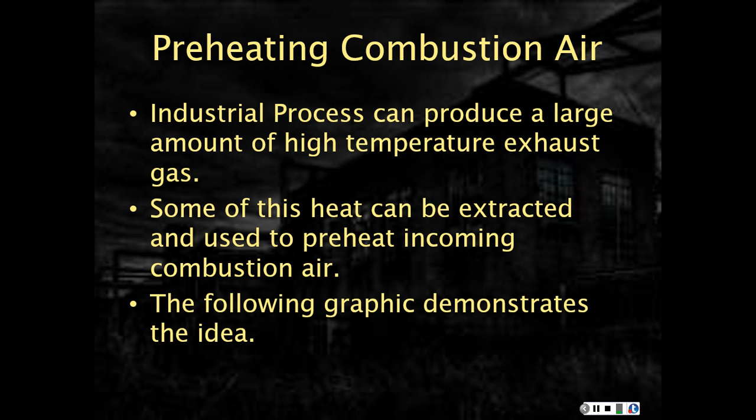The following graphic demonstrates the idea. Here's the situation that we have initially. We have some sort of industrial boiler and/or process. It's bringing in combustion air. Now, depending on where it's taking it from, it may be taking it from the surrounding area, or it may be ducted in from the outside. Either way, we have a temperature of supply air for the combustion air gas. This is being heated up in here to do whatever process we're doing, and then we're exhausting very high temperature gas. In this case, we're exhausting gas at 2,600 degrees Fahrenheit.

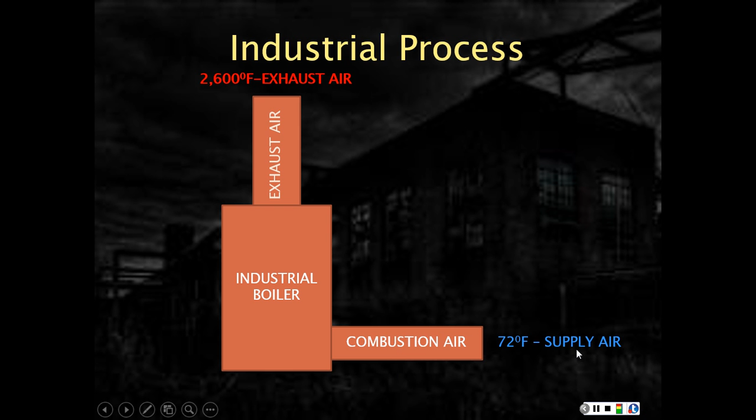What we'd like to do is extract some of this heat from here and preheat the supply air here, as noted on this slide. So we have a heat exchanger in the combustion air, we have a heat exchanger down in the supply air, and then we have some sort of fluid, oil, something that's tolerant of real high heat, that has an ultra high boiling point, that we can circulate down and through the heat exchanger to transfer some of that heat.

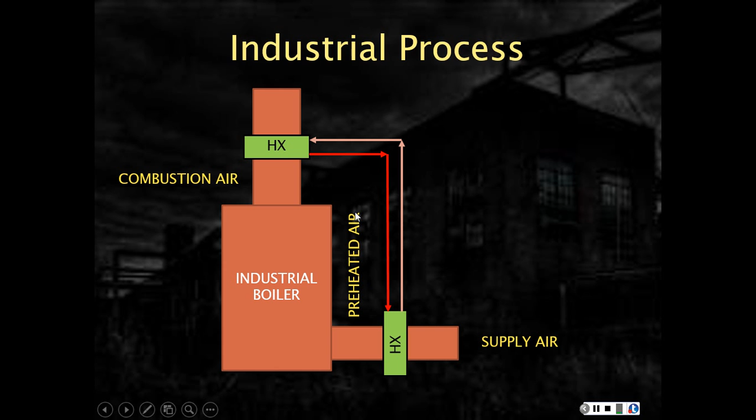Now the equation for savings. It's basically a 3-step process. Step 1 is we need to calculate the preheated supply air temp. So if we go back to the previous slide, you'll notice that this is our supply of combustion air initially coming in. It's run through this heat exchanger. Now it's actually been preheated. So we actually have a preheated supply air going into the industrial boiler. We need to determine this value first. So that's step 1.

Step 2, we need to get the fuel saved from a proper table. Now I've included those tables in your notes, so you have the proper tables at the end of your notes. Then we take that and we calculate savings. So again, 3-step process. Now there's 2 sets of formulas. The first formula is to calculate the preheated supply air temp. What we're going to need there is the exhaust air temperature coming off the boiler initially, and we're going to need to know the initial supply air temp, which is whatever the temperature of that combustion air where it's pulling it from.

This is multiplied by an effectiveness number. Now, high temperature heat exchanger manufacturers are the ones that produce the effectiveness number, which is really the efficiency of the heat exchanger. The typical number used is about 55. So that's what we're going to be using in our example. But you can go to the heat exchanger manufacturer for these high temperature heat exchangers and get a precise number depending on your application.

Now, once we get this preheated supply air, we take that along with the exhaust air temperature and go to a table, which we're going to look at in a minute. We bring that back after we calculate from the table a percent fuel saved, and then we can plug it into this bottom formula and get how much money we're going to save per year.

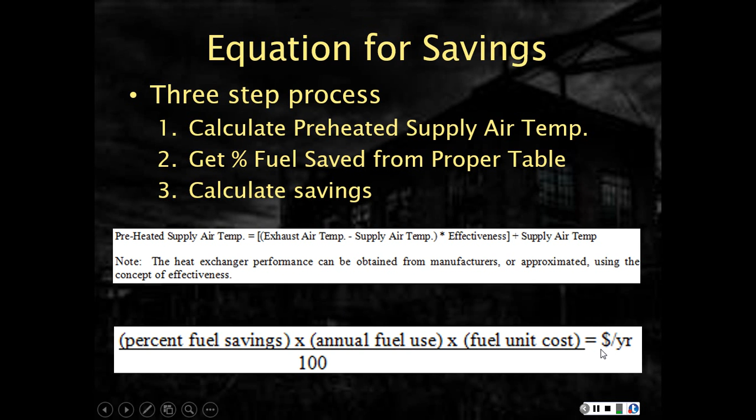So, step 1, calculate preheat. Again, effectiveness, this is the efficiency of that high temperature heat exchanger. On this application, we're going to assume 55%. Again, you can go to the heat exchanger manufacturer and get precise numbers. It just happens that most of them are about 55% effective or efficient. What you need is the original supply air temp, in other words, the temperature of the air where I'm pulling my initial supply air for combustion. I need the exhaust gas temperature and the effectiveness. And again, we're going to use 55.

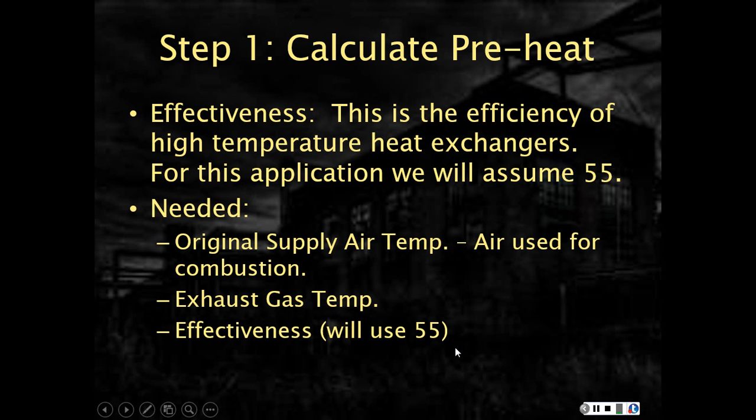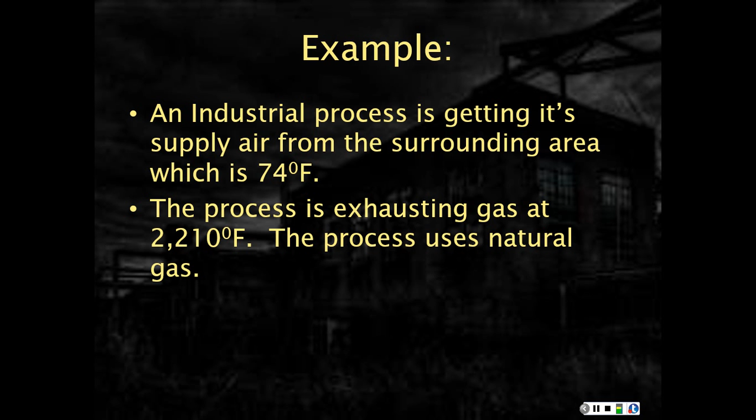So here's our overall example. I have an industrial process. It's getting supply air from the surrounding area, which is typically around 74 degrees. The process is exhausting gas at 2,210 degrees, and the process is currently using natural gas. So that's important when we take it to the proper table. So given supply air temp 74, exhaust air temp 2210, process annual fuel use about 12,456 ccf. The fuel content per 100 cubic feet is 100,000 BTUs, and they're paying about 49 cents per ccf.

So step one would be to calculate the preheat of the supply air temp. So we take the exhaust air minus the supply air, then multiply by the effectiveness, and then we add the supply air temp. So when we run through that equation, we get a preheated supply air temp of 1248.8. So you can say 1249.

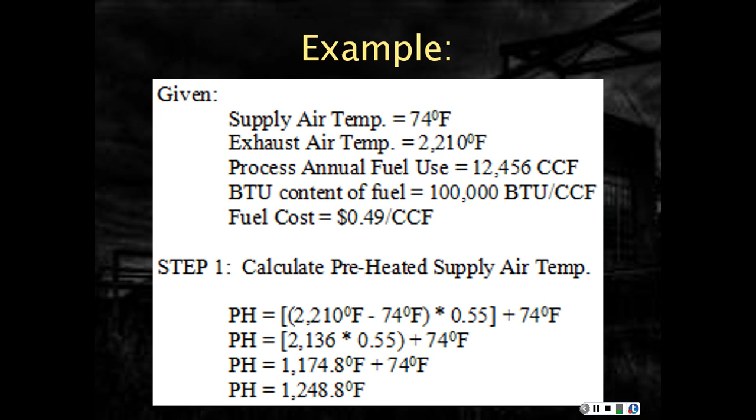Step two, we need to get the fuel saved from the proper table. Use the proper fuel saved table, in other words, for whatever you're using, whether it's number 2 fuel oil, natural gas, whatever. You need the exhaust air temperature and you need that preheated supply air temperature that you just calculated.

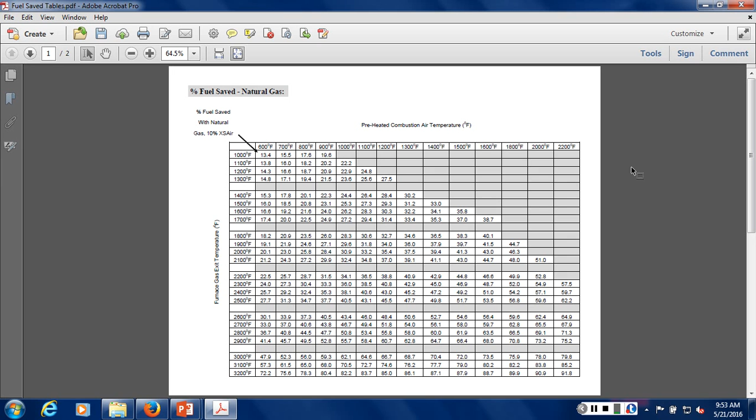And all these numbers within the table, those are a percent of the fuel saved by preheating that combustion air. And you can see it can be fairly significant. Now let's go back to our example. We calculated our preheated supply air temp at 1249. Our furnace gas exhaust temperature was 2210. You'll notice that from that natural gas table, both these numbers fall between actual values.

So this is my little interpolation table. What I do is I put the value of percent fuel saved for the 2200 exhaust gas temp at a 1200 preheat temp. I would save 38.8% of my fuel. Then I put in the high end. So in other words, I'm putting in the numbers that bridge both the preheat air and the exhaust air. So I put those four values in. Now what I'm shooting for is a value that's going to occupy this center square. So the bad part is that I'm going to have to do a double interpolation on it. So you do one direction first, then the final direction.

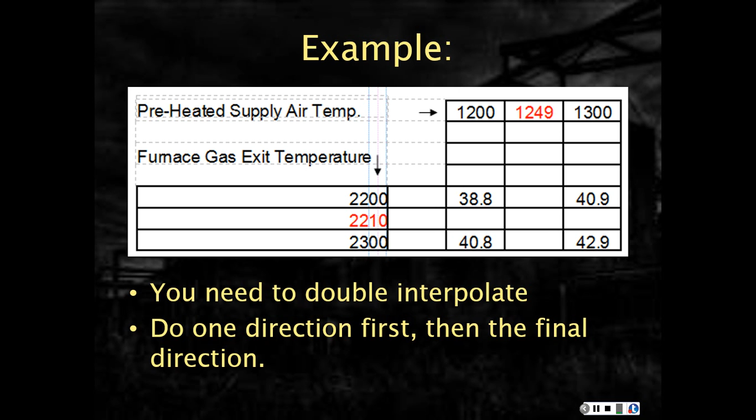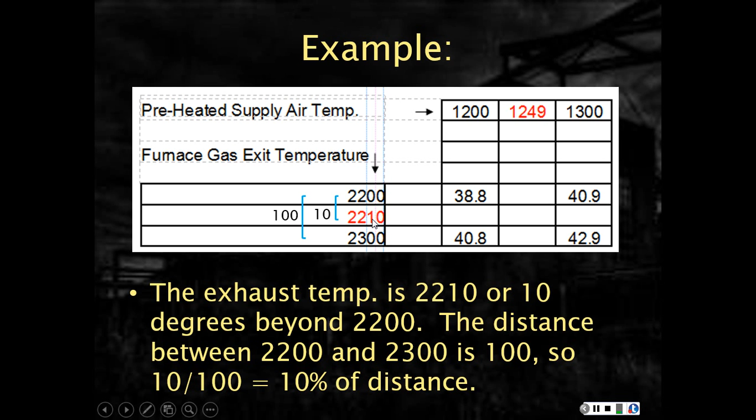So step one, if I look at the distance my exhaust temperature is, the total difference between things on the chart is exactly 100. And in my case, I'm at 2210 from the 2200. So in other words, I've moved 10 increments over an overall distance of 100 increments. So that distance over the total distance that I could travel, I simply set up a ratio, 10 over 100, which really makes it easy. So I'm 10% of the distance along this table. I can apply that same situation to this.

So in this case, my total distance of fuel saved is 38.8 to 40.8. So that total distance is a distance of 2. I know I went 10% the distance here, so that means I went 10% this distance. So 10% of a total distance of 2 is 0.2. So I have to take that 0.2, add it on to my starting point. That means at 2210, my fuel saved is 39. Now that's at a preheat supply temp of only 1200.

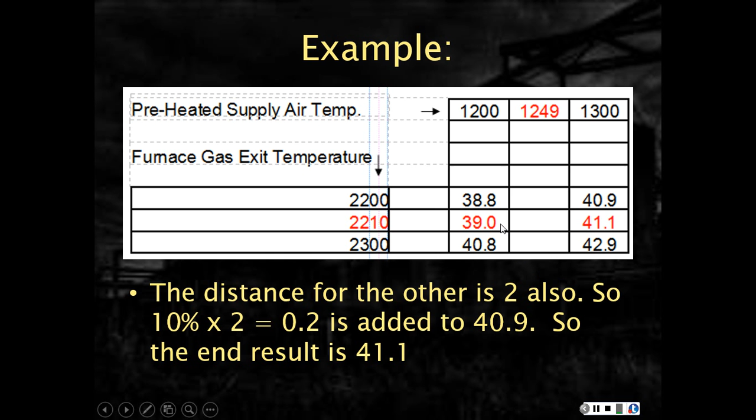What I have to do now is move over to this category and do the same exact thing. Again, my distance from 40.9 to 42.9 is also 2. I've gone 10% from here. So again, 10% of 2 is 0.2. I add that on to the 40.9, so I get 41.1. So now I have the percent fuel saved at a specific exhaust gas temp. Now I have to figure out what distance I've gone in this direction. So I have to interpolate between the 39 and the 41.1.

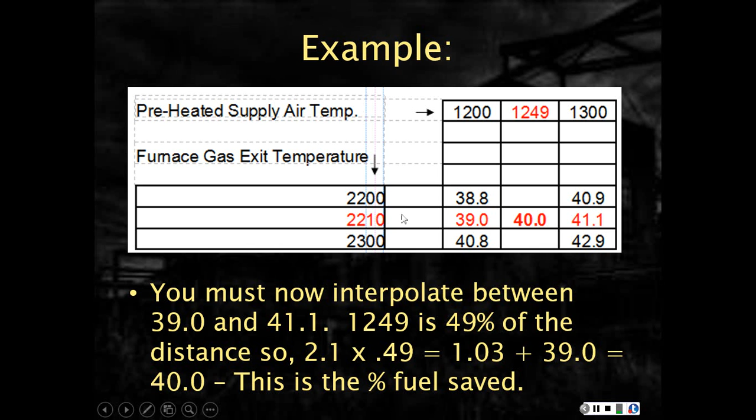So if I look up here, my units between my starting point and ending point again are 100. In this case, from here to here, I've moved 49 points out of 100. So 49 over 100 is 49%. That means down here, I have to have moved 49% of this distance. So the distance between 39 and 41.1 is 2.1. I know I've moved 49% of that, so 0.49 times 2.1 is 1.03. I add that to my starting point, and I get exactly 40. This is my double interpolated percent fuel saved for the condition of preheat air 1249 and exhaust gas of 2210.

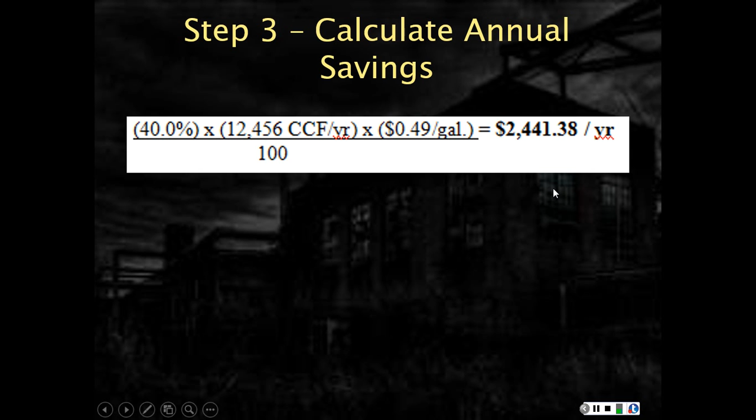Now I can take that 40% fuel saved back here, multiply by my total fuel usage for a year, times the cost of my fuel, and again, because that's a percent, I have to divide by 100, because really it's 0.4. And my savings is the fuel that I saved over the total fuel used, and I saved $2,441.38 by simply capturing heat coming off that exhaust gas and preheating my combustion air.